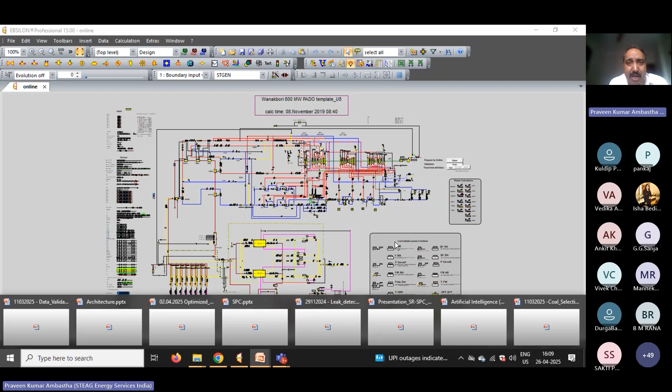Then we are using it for our coal matrix. Then we are using it for boiler tube leakages, so how this AI is helping us to predict boiler tube leakages, that I will explain to you. And then the coal selection matrix, meaning in the coal yard also we are using AI technology for the coal selection matrix. So these things I would like to cover. And then you'll be able to know how we are using AI, and especially how STEAG is doing this AI technology in our digitalization field.

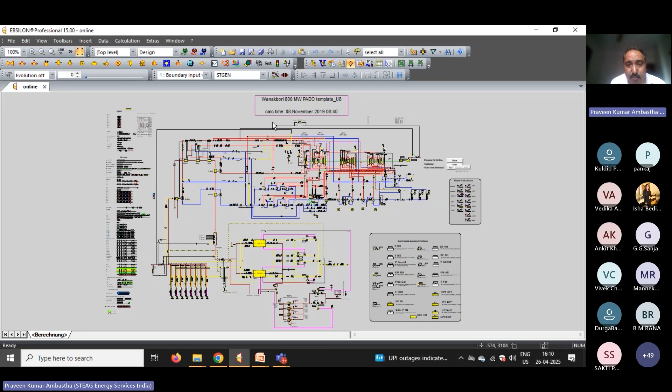So first thing, as you know, digital twin. I would like to show you what this digital twin is. You can see it here. This is basically an EBSILON model. This is the digital twin of an 800 megawatt Gujarat plant. Here you can see this is the cycle side of the plant. This is the HP, IP, and LP turbine.

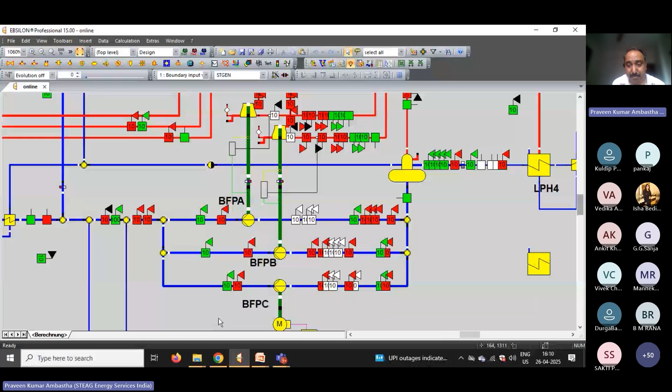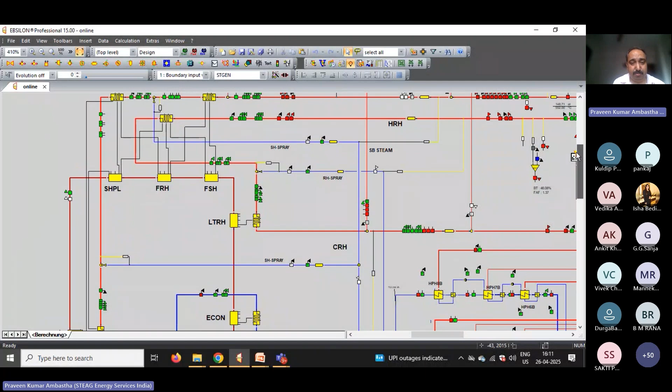It's an 800 megawatt digital twin, and then we have the LP heater side. Then we have the deaerator, and then the turbo driven pump. On the left side, we have the HP heater side. So this is the cycle, and on the very left, we have the boiler. This is the furnace. And then we have the platen superheater, final reheater, final superheater, then LTRH, then economizer.

These are the milling area at the bottom. And then we have the air heater. These are the fans area, ESP, ID fan, and then the stack. So this is the digital twin of an 800 megawatt Gujarat plant. This model is developed in the software EBSILON. EBSILON, you must know, is a STEAG software, and the whole development is done in Zwingenberg, Germany.

And we have the licenses. We supply the CMS, central monitoring system. We supply the PADO system to NTPC and non-NTPC power plants. So behind all the calculations, we use this digital twin. We prepare the virtual plant, and this virtual plant runs with the plant data. As your plant runs, with the same data we run the virtual plant and give you the output: the performance of your boiler, turbine, condenser, pump, heater, everything.

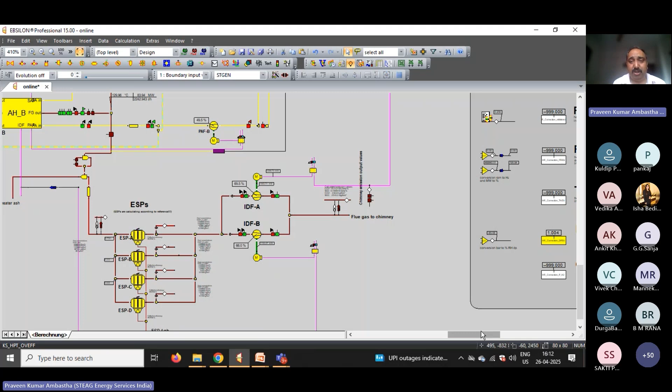So this is the digital twin that I wanted to show you. And yes, behind this digital twin, we use the AI model. So first, whatever you want to do, AI model or anything, it requires data. So how do we take the data from a power plant? Of course, the architecture we require is like this. Just a moment.

So you must have a DCS system. You require a DCS system to take the data. And then from the DCS system, you must have an OPC interface. So from the OPC interface, we take the data. Whoever is the OEM of the DCS, they provide you an OPC so that any third party can take the data from the DCS system.

So this is the DCS system, and from the DCS system, we take the data through the OPC interface to our data management system, where we are going to store the data. Of course, in our stack, we have the data management system known as SRX.

And once we have the data management system, then we give this data to the digital twin or to any of the modules to run. Then, of course, we prepare the AI model for different modules. So the first thing is the data validation system.

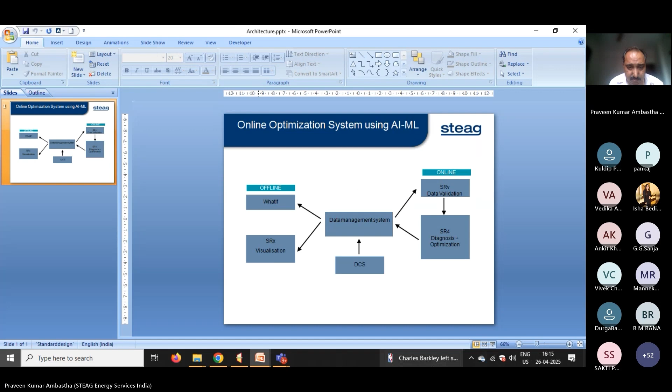So, of course, the digital twin depends upon first principles of thermodynamics and neural networks. So what is a neural network? As Vedika has already explained, you have the input. I am just opening my neural model so that it will be more clear.

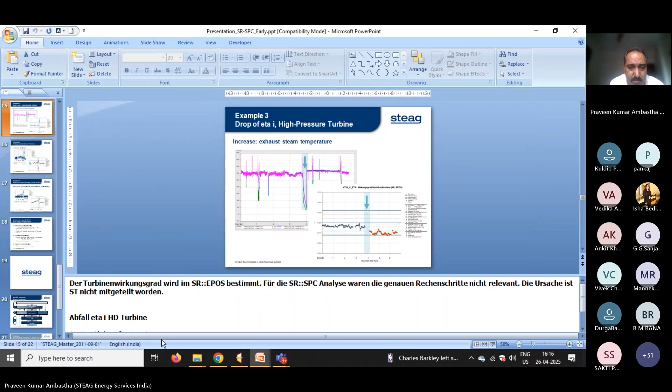So what we can see in a neural model, as Vedika has explained, is that you have the input layer, then the hidden layer, and then the output layer. In the input layer, you have the input and you provide some weightage to it. Then it is processed in the hidden layer. Then in the output layer, you check whether your weightage is correct or not, because you know the output.

Let us suppose I know that my main steam temperature is 540 degrees centigrade. And let us suppose I have four measurements of main steam temperature: 532, 538, and one is, let us suppose, 240 or 280. So I know that this 280 degrees centigrade is false. So it will identify this as a bad value, and it will be replaced with the neural value.

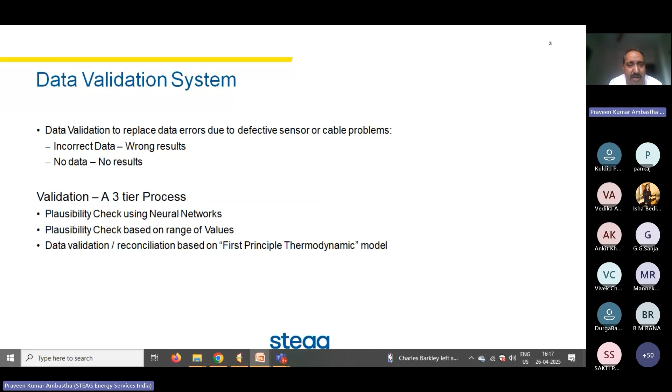So it goes to the neural model and tries to find out, under these circumstances, under this load condition, under this vacuum, what will be the best fit, and accordingly it finds the value for the bad one. So it's a three-tier process: neural model, neural network, and so on. And then I will show you some examples of the neural network.

This is one of the NTPC power plants. Here you can see the primary air temperature after your air heater. One of them, 70 HFE 40 CT 108 XQ03, is bad. And one of the temperatures is 323. You can see the upper one, PA out 3, is 323, and this 70 is a NaN value. So here I can see that this PAHB M T PA out underscore V, meaning it is validated.

It is replaced with a neural one, and this is basically 323 degrees centigrade. So here we can see the primary air temperature after air heater. Let us suppose I am having four values; three are okay, but the fourth is bad, and I have to do the calculation and it should be the average one. So the bad one will try to find its best fit from the neural model, and then it will be replaced from the neural one.

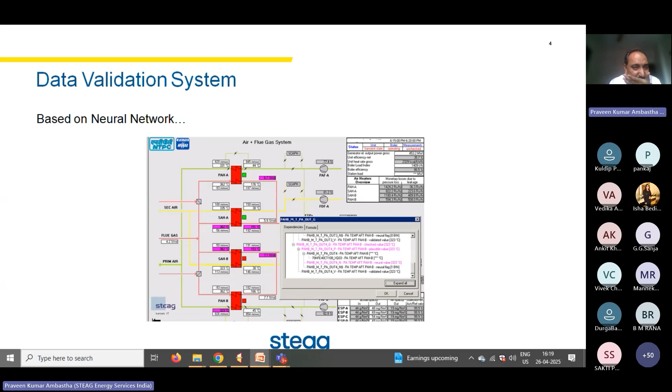For the neural model, of course, we are having the data for 1 year under different load conditions. So it will try to find out under this condition what will be my primary air temperature with best fit, and generally we find very good results from this neural model.

With this we can see, let us suppose I am having a raw measurement and I am having a value from my data reconciliation. Let us suppose this is the green one. And then we are having the precise measurement. Precise measurement means measurement when we put some special equipment, let us suppose we are doing a PG test or something like that.

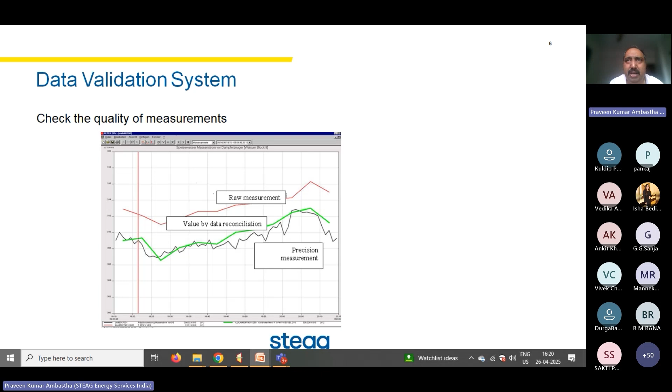Then we can see that our data reconciliation, meaning the data coming from the neural model, and the data which is very precise are very close. And we have seen that for the bad data, we use this neural model, and it's having a very good fit.

So generally in a power plant, wherever we install our performance monitoring, we do not do the data validation or make the neural model for megawatt, condenser vacuum, coal mass flow, and of course the flue gas temperature after economizer, which are very, very vital, and oxygen after economizer.

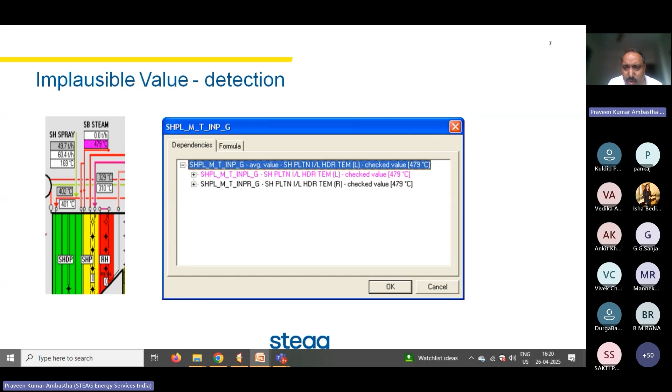So we do not make the neural model for these, but for the extraction side pressure and temperature, or the temperature of the feed water and condensate side, and the steam side, all those measurements we make the neural model. And we find that the neural model is very, very well fitted and it is well replaced.

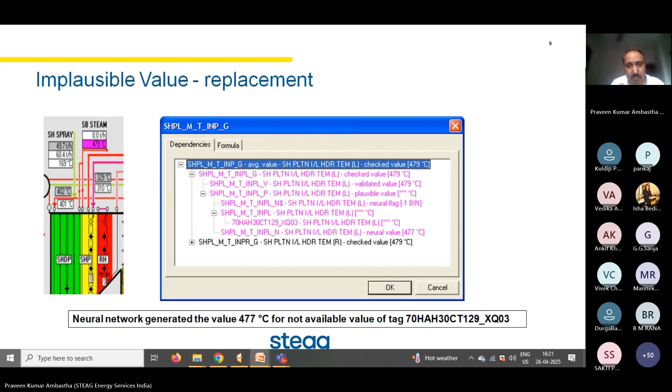But this is not the final one. We don't say that our solution will run with the neural model only. No, we give the list to the C&I engineer: these are the values we are replacing from our neural model, so kindly correct those measurements. It's the duty of the C&I engineer to correct those measurements so that the solution will be able to give you a right result.

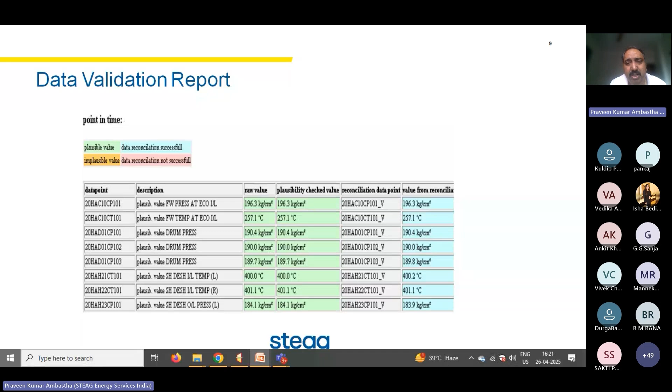And of course, the learning should be continuous, because once you have trained the neural model, it doesn't mean that it will be valid forever. As Dr. Vedika also told, it's a continuous process, so you'll have to train the model regularly. We generally put it in auto train so that the training will be continuous with the latest data. So this is how we use the neural model for our data validation system.

Data validation is one of the very important things, because when you don't have correct data, you cannot have a correct result. But from our experience, we cannot have all correct data from a power plant. Let us suppose we are pulling 1000 or 1500 data points; there will be bad data. So we must have a replacement, and for the replacement, the neural model is the best one.

And now I am coming to my second topic, that is boiler cleaning management, and how we are using the neural model for boiler cleaning management. Whenever we show you in our solution that the color is red, it means the surface is dirty and you require soot blowing.

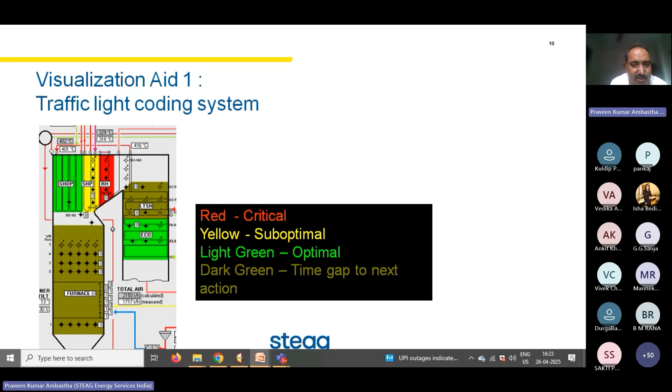If my surface is yellow, it means the condition is suboptimal; it is going to deteriorate, so you require soot blowing later. And if it is green, the surface is completely clean and you don't require soot blowing. So this is the way, with the traffic light system, we show you the condition of the heating surfaces.

So what is the problem with the soot blowing? Why do we require the soot blowing? So first thing is that when our surface is not clean, then we are having a very high flue gas temperature at the end, and we are having a high dry gas loss. Second thing, we must have a high superheater and reheater spray flow. And of course, if there will be lots of slag and all, we can have unplanned shutdowns, damage of the ash hoppers and all.

So yes, soot blowing is one of the very important things. And if my surface is clean, in spite of that, I am doing the soot blowing, I am having a high cost because we are using a very high costly steam. During the soot blowing, generally we tap the steam from the superheater area or the PRDS area. So generally from the superheater area. So it's a very high pressure temperature steam. It's a very high costly steam. So we are basically wasting the steam when the surface is clean.

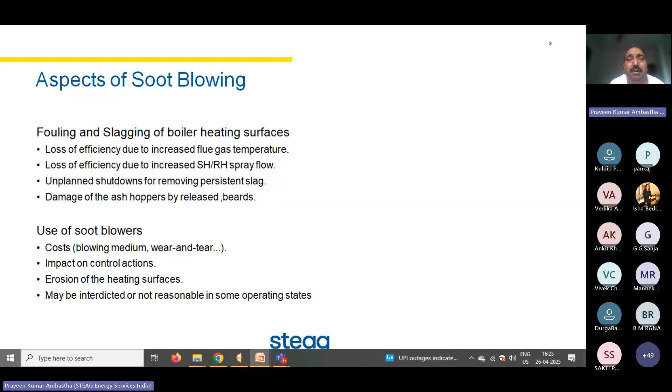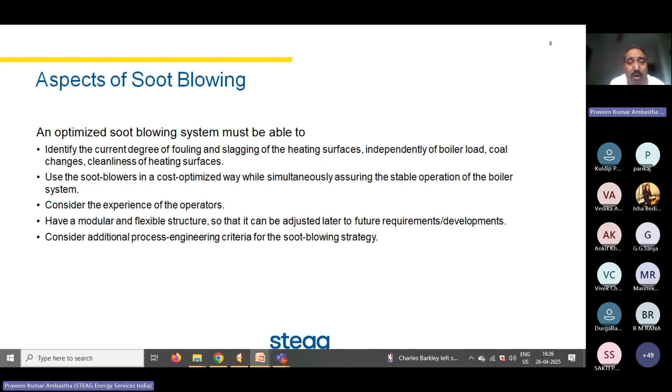So first I would like to tell you that we calculate the heating surface efficiency. So how heating surface efficiency is being calculated, I will show you something. So yes, this soot blowing module gives you the information of how much is the current degree of fouling, whether the fouling is 50%, 60%, 80%. And of course, a digital twin is being used, a neural model is being used to find out the degree of the fouling. And second is the cost optimization.

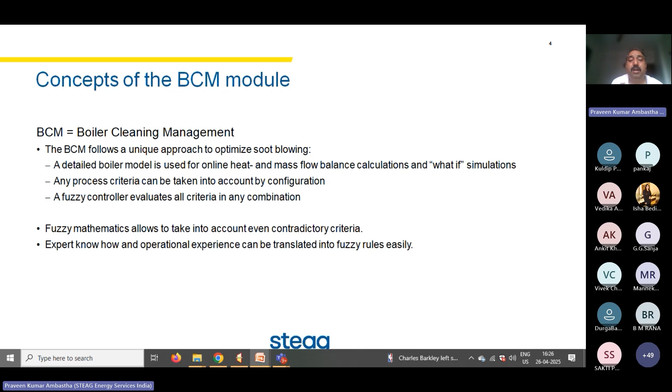So in the BCM module, we use the digital twin, we use the neural model, we use the fuzzy logic, fuzzy controller to give us the information whether my surface is dirty or not dirty. So what are the criteria that are taken into account whether we do the soot blowing or we don't do the soot blowing? How does a fuzzy model work?

So the first criterion is heating surface efficiency, whether the surface is dirty or not dirty, that is being calculated, and that is very, very important. Second thing is reheater spray flow. How much is your reheater spray flow? Then flue gas temperature at the back end, meaning after the air heater. Then we take into account the cost also, what is the soot blowing cost. Then the interaction with the neighboring soot blower level. Then what is our sequence of soot blowing? Because generally in the water wall, we do it from the bottom to the top.

And generally in every power plant, I can see that there is soot blowing in every shift. At least in 24 hours, they must go for the soot blowing. And for the LRSB and all, they go for a week and all. But for the wall blowing, they generally have the soot blowing every 8 hours, or every 24 hours. So these are the criteria.